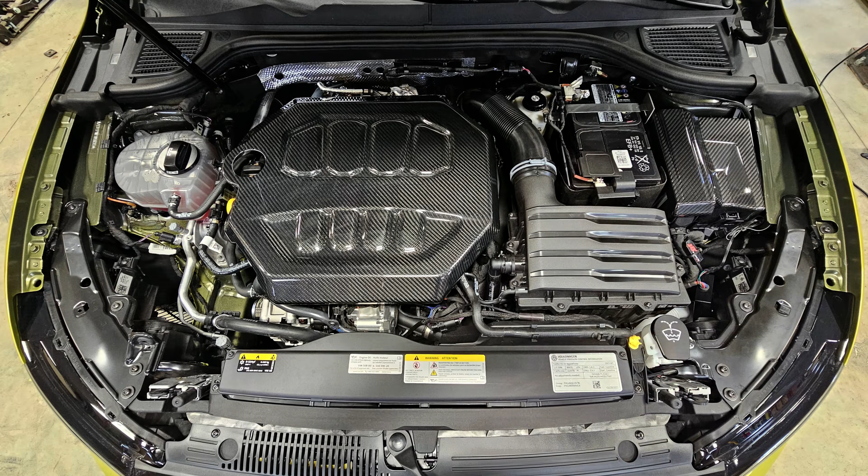Disclaimer number 5, I am running all OEM hardware. It's safe to say and safe to assume that if I were to install some aftermarket performance hardware, my car would make more power on each of these tunes. But just know that right now I am completely stock performance hardware. The only things I have installed in the car are cosmetic or things that make a bit of noise, like the CTS turbo muffler delete, as well as their blow-off valve.

Number 6, my TCU is locked. I am sorry to say that at this present time, my 2023 Volkswagen GTI still has a locked TCU, meaning that there is a torque limitation set by the manufacturer that I cannot surpass.

With that being said, I'm unable to see whether the tunes provided to me are going to be riding that torque limit, or whether they're going to be set at a safer, lower torque limit and possibly give me a flatter torque curve. I'm not exactly sure the limitations on this transmission with it being locked, but all I know is there is the possibility that some companies are riding that torque limitation. Maybe it's going to be up and down a bit, and other ones may have played it a bit safer on the low torque tunes and flatten that out at a lower level.

Number 7 is that I will try my best to let the data speak for itself.

I could go out on the back roads of Mexico and give you subjective information about how well the car drives, how refined it feels, but that's just my opinion. In these videos, I'll try my best to let the data speak for itself, in terms of power and torque on the dyno running each of these different tunes.

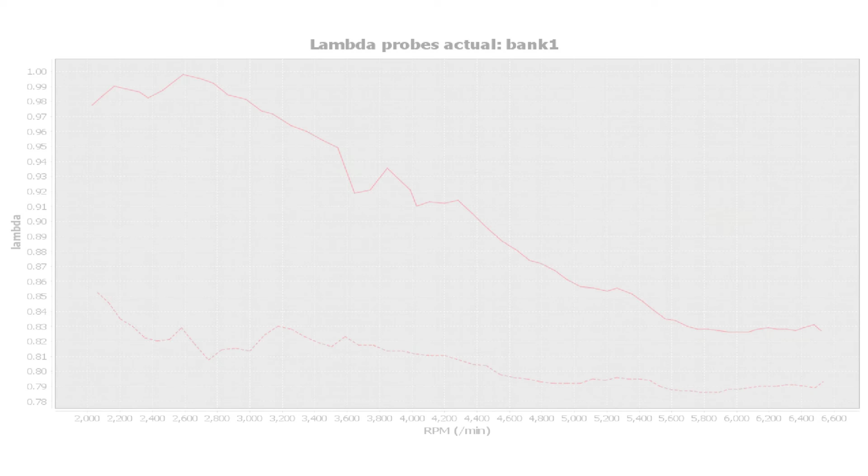Number 8, the air to fuel ratio, or lambda, in each of these tunes may vary. Keep in mind that the leaner something is in terms of AFR or lambda, it might make more power, but it could also affect the longevity of the motor. Whereas if a software company tunes something on the richer side, the motor's longevity might last a little longer. I'm not going to be sharing or going over that in this video series.

Number 9, I will not be sharing any of the data logs I capture on my Mark 8 during this entire process with the public. The reason is each of these companies spent a ton of time, money, and energy creating their own version of the spicy sauce they use to make the GTI work as well as it does on their software. I don't think it's fair, and it would be disrespectful of me to put that out into the public. If you want to know the logs, I highly suggest you purchase each company's software and test them for yourself.

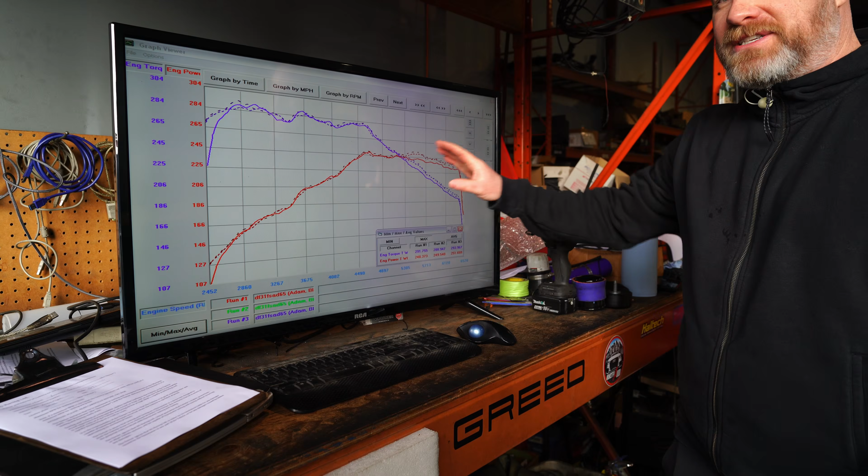In regards to how we'll be doing the testing today, every manufacturer will have 3 runs on the dyno, and once we have them up on the screen, we're going to go with the smoothest of the 3 pulls. We're using a Mustang all-wheel drive dyno, with a smoothing level of 6, and the results are going to be uncorrected.

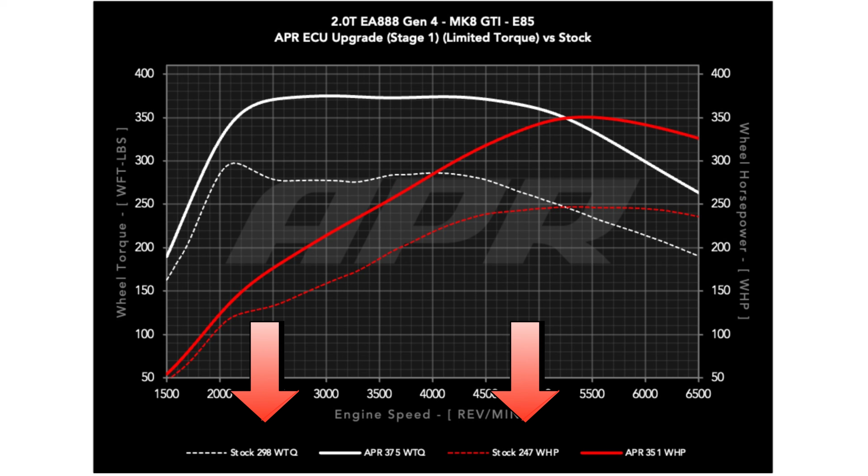You guys should know we're using a dyno jet calibration on this Mustang dyno, because we've seen it very closely resemble the results of other dyno jets across North America. Also, our stock calibrated Mark 8 GTI ran very similar to APR's results on their stock Mark 8 GTI.

And now, what are we running for fuel? You can run between an E60 and an E85 blend on all of these tunes. I reached out to all the tuners to ask what's the most optimal level of ethanol I should use to test on my car on the dyno. They all said roughly E70, except for one that wanted E80 or higher. So I filled up with pure E85 today to make sure we're getting the most out of the tunes on the dyno.

During the disclaimer portion of this video, I discussed that I'm using all stock hardware for performance. I do have some shiny bits here and there and some noisemakers, but all stock performance hardware. I had to modify that stock hardware to make sure my car worked appropriately for this video, and I'll quickly explain why.

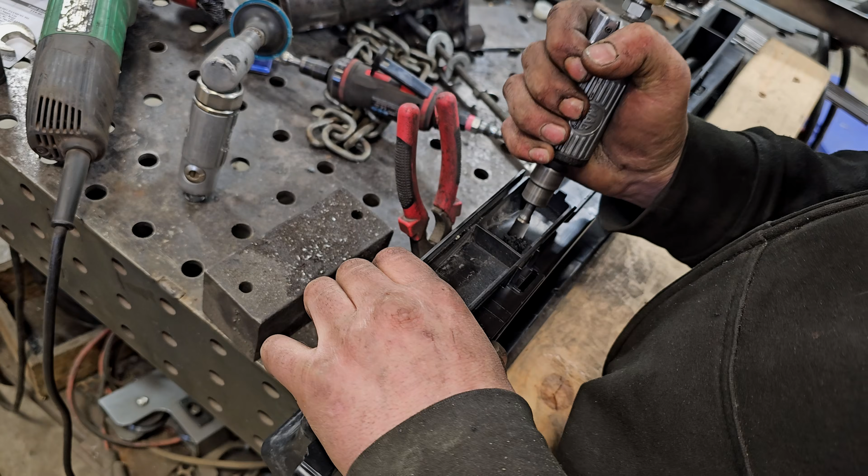I always do some wide open throttle 4th gear data logs prior to getting on the dyno to make sure all of these tunes work properly. For a couple of those tunes, it wasn't working properly. I was getting a drive system malfunction, anywhere from 5700 to 6100 RPM, with completely stock hardware. We were confused, because these tunes are specifically designed for stock hardware. So we reached out to some of the calibrators asking what could be the issue, and they said maybe it needs more airflow. So we cut into the stock air intake duct to allow for more airflow, went out, did another 4th gear pull, and it worked.

No more issues. I do want to give credit to Unitronic though, because we went out with completely stock hardware, no modification made to this box, and their software worked perfectly. But there were some other ones that had issues.

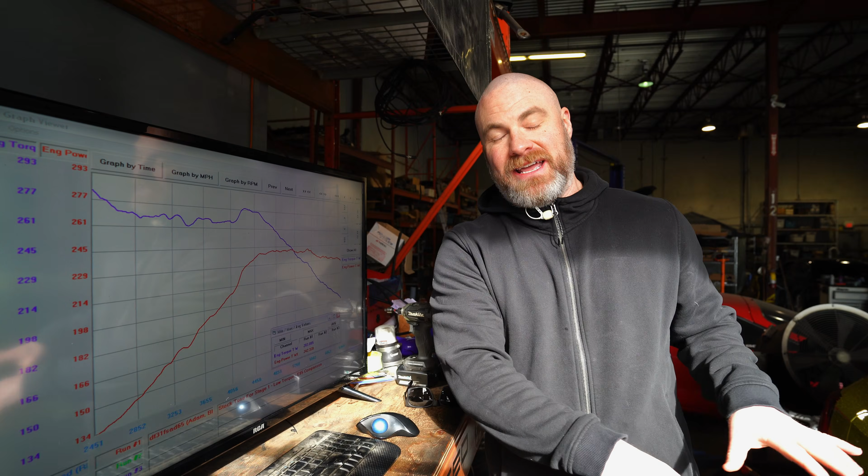Now, the final thing to discuss about this video that's going to be a little different than the other videos is we're not doing a stock baseline run today. That's because the car's filled with E85, and we'd grenade my motor on a stock tune running straight ethanol.

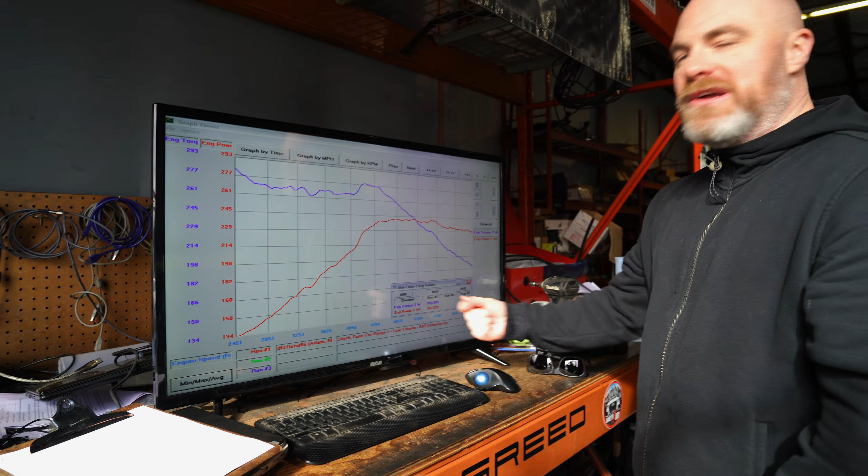So what I've done is gone through the extensive database we have here at Greed about all the stock runs we've done. I found one that was kind of in the middle with a decently smooth curve. This is our stock run, done on a previous day running 93 octane fuel. I made 242 wheel horsepower and 283 wheel torque. That's our baseline today.

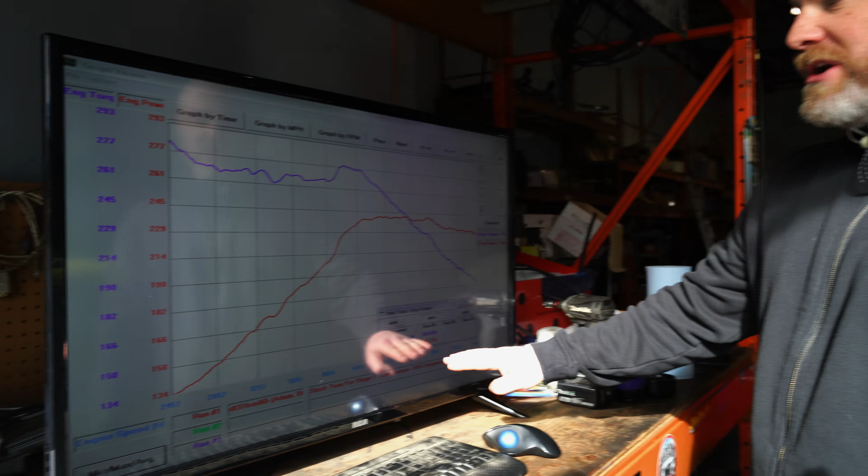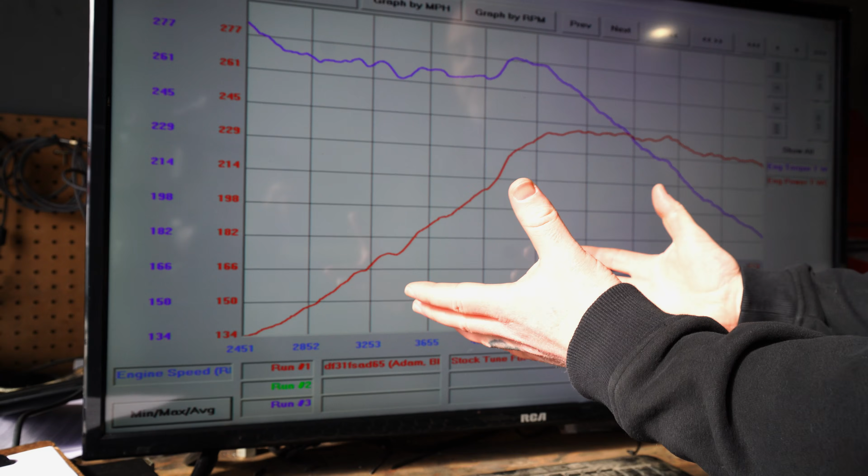Before I choose which company goes first, I'll give you a quick education on how to read a dyno graph. These numbers only correspond to the peak figures we see. This 242 wheel horsepower only represents this tiny spot on the graph, and this 283 wheel torque only represents this tiny spot. There's so much more to look at. Your torque you'd like to see nice and flat, holding as long as you can. You'd like to see your horsepower peak and go nice and high. If you see a really high torque figure down low, the car's gonna feel fast. But if you have really high horsepower up here, the car's actually gonna be fast when you're racing.

To keep things fair and even, I'm going to do the same method I did in the previous videos. In this bag there are pieces of paper with the logos of each company on them. I'm going to shake it all up and pick them out one by one, and that's the order we'll be testing in today. Let's see who's first.

There's one. Number 1 on the dyno today: Unitronic. Unitronic going number 1.

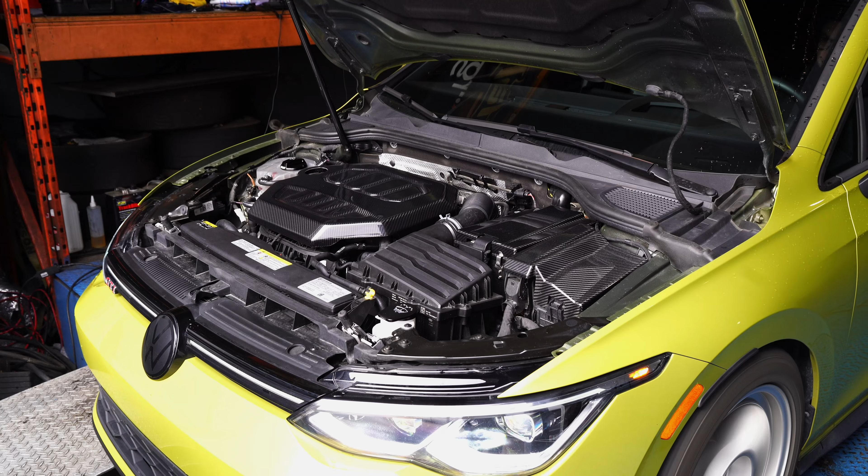If this is an indication of how today's going to go, I'm going to be a very happy camper. Unitronic's out of the way, and we made so much power. I was totally wrong about what I said in the last video about not making much more. This is incredible. Let's take a look at the graph.

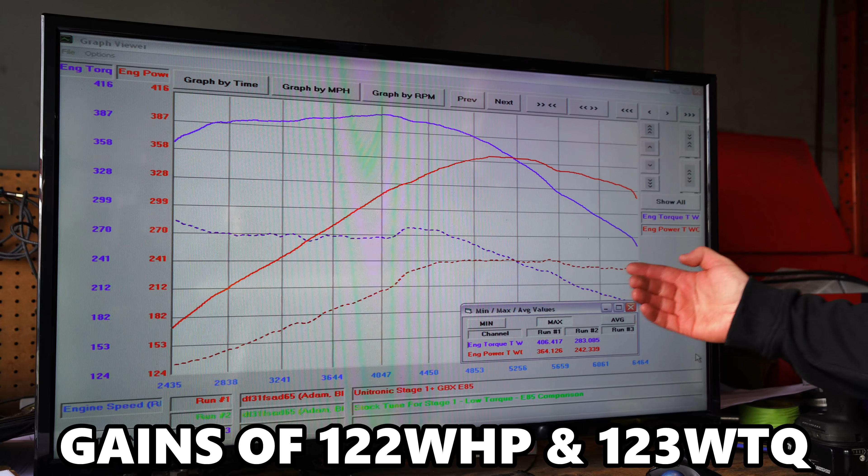122 wheel horsepower gain and 123 wheel torque gain from the stage 1 E85 file compared to stock on 93 octane. Look at those curves, holy moly, that's a lot of power and a lot of torque. Very, very smooth on both accounts. This is gonna be fun.

Unitronic down. Who's gonna be number 2? Number 2 is 034 Motorsport, going number 2.

If you watched my last video about my subjective review of the different tunes on my car, you may have caught when I tried my 100 to 200 and 60 to 130 testing and how it didn't work out due to constant complications. I just had another one - we finished the Unitronic tune and now, flashing the car with 034 software, the immobilizer kicked on. This hasn't happened before.

I reached out to 034 for help and they were immediately on it, saying I need to lock the car, get the key away, wait 10-15 minutes and try again, by which time all the modules should have gone to sleep. This is the first time this has happened with my MK8 GTI, but I wanted you guys to know there's going to be a longer period of time between testing because of the immobilizer issue between the Unitronic and 034 runs.

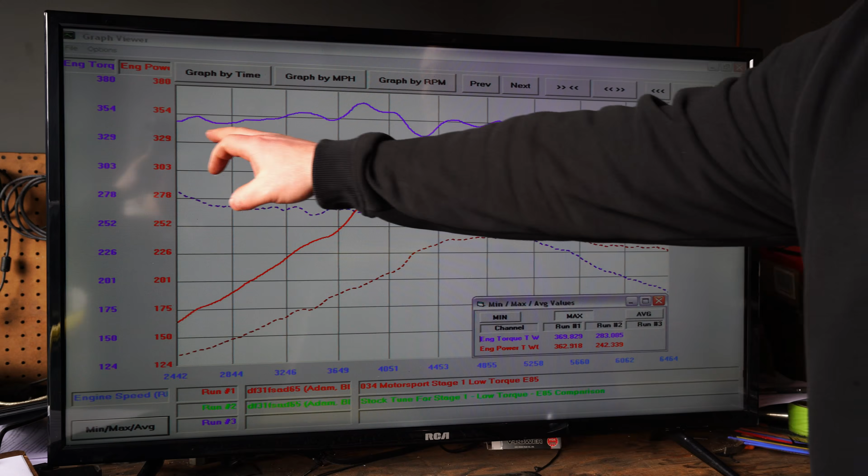Now, I can't say they see the exact same flat torque curve they had before - there was quite a bit of up and down on that run. You can see it dip at the exact same portion, about 4,100 RPM. Both the torque and horsepower drop slightly before heading back up until they reach peak horsepower, which is about 5,300 RPM.

Number 3, let's see who comes up. United Motorsport, number 3.

United Motorsport is done. They made 113 wheel horsepower and 96 wheel torque over stock. That puts them with the lowest horsepower so far, but kind of right in the middle with the wheel torque.

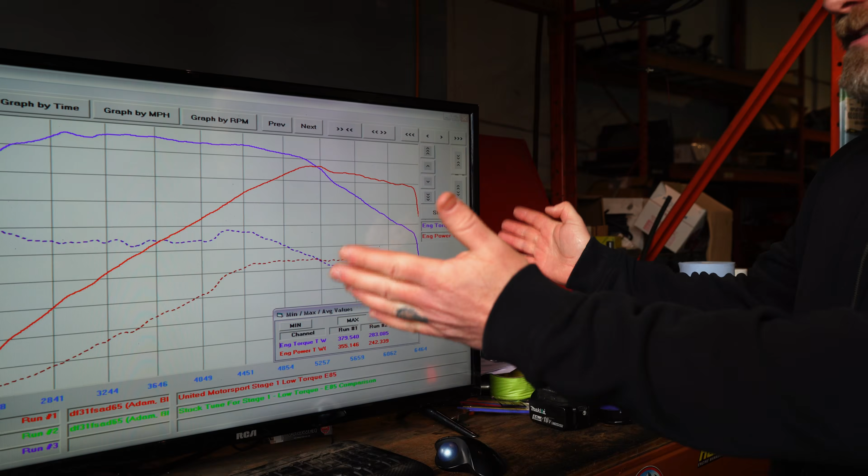Let's take a look at the graph. Once again, they've done it. This was pretty consistent for all 3 runs. Really, really nice and smooth. Extremely smooth power band. Not quite as high as Unitronic, but very, very smooth.

Only 2 more to go. Who is number 4? Number 4 is APR.

APR's 3 runs are done. They made 111 wheel horsepower and 85 wheel torque over stock, putting them at the lowest wheel horsepower and the lowest wheel torque so far today, by just a smidge.

Let's take a look at the graph. The torque looks reasonably flat, but we do have this weird dip at about 3,300 RPM before it flattens itself out. The horsepower in roughly the same area also takes a dip, flattens out, and then up top at about 5,100 RPM, you get this weird bump up in horsepower. It's not as smooth or as linear as the other tunes.

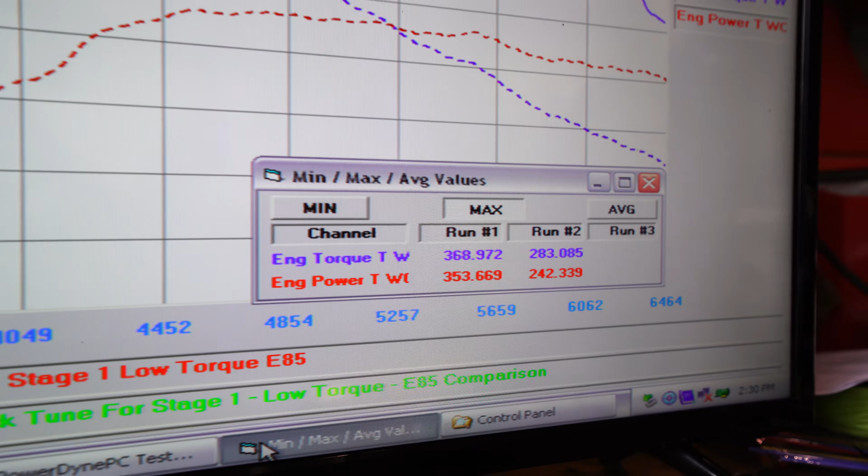And there's only one more to go, and that would be Tunezilla. Number 5 and final. Let's see what they can do.

We've wrapped up the final tune of the day with Tunezilla. We made 120 wheel horsepower and 128 wheel torque, the highest torque level of the day, and tied for second for their wheel horsepower. Let's take a look at the graph and see how they did.

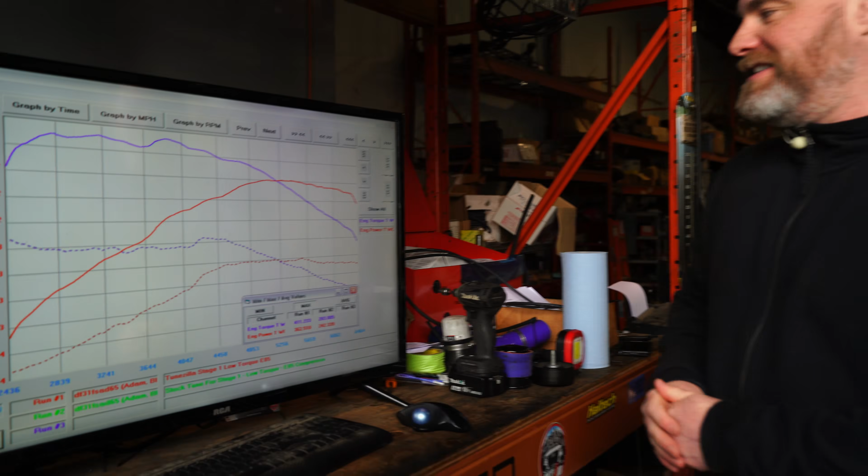Reasonably smooth curves. You get a bit of up and down, but nothing too severe. Their horsepower does look nice and smooth all the way up to red line. A pretty damn good looking graph from Tunezilla.

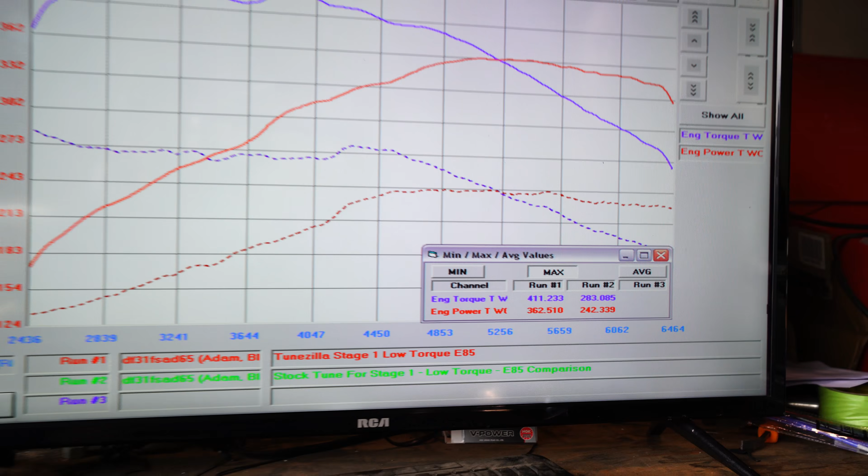Now that we have it wrapped up, let's take a look at the top 3 performances for wheel horsepower. Number 1 being Unitronic, number 2 being Tunezilla, and tied with 034 Motorsport for number 3. The only reason I put Tunezilla as number 2 and 034 as number 3 is because of the torque differences. Torque is much higher on Tunezilla.

And for the final comparison of the day, we're going to be comparing the 3 highest wheel torques of the day. Number 1 going to Tunezilla, number 2 going to Unitronic, and number 3 going to United Motorsports.

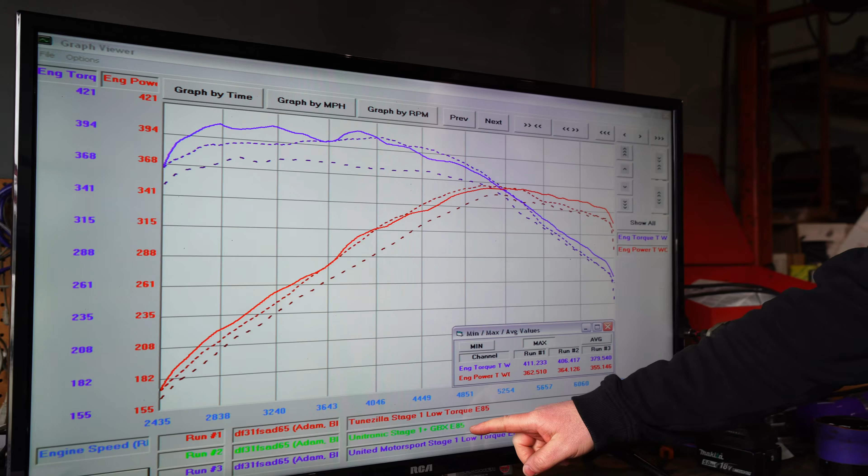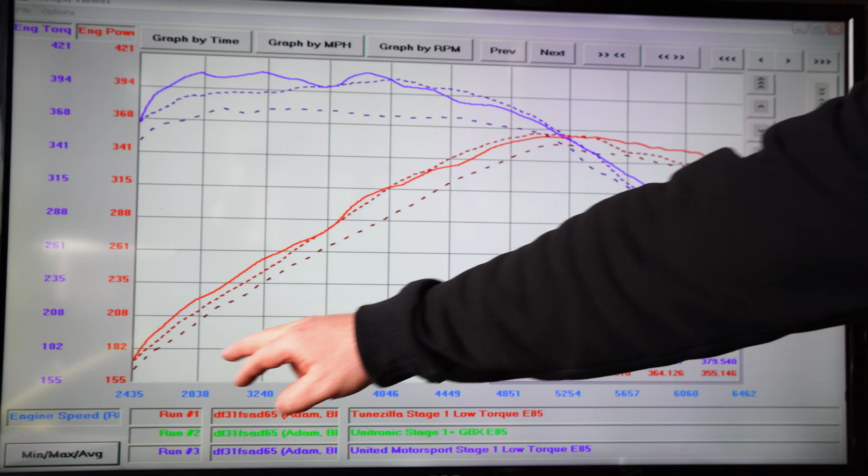What we see on the graph again is some waviness up top from Tunezilla, and then it tapers off. Unitronic and United Motorsports are very, very smooth, but Unitronic is significantly higher than United Motorsports. In terms of the horsepower, we see all 3 taking off nicely, but we do notice that United Motorsport trails below the other 2 in the low range and the mid range. Not until you get up to that special level of 5,200 RPM do they kind of all meet up, but we do see up top that Tunezilla produces more horsepower and more wheel torque than the other 2 tunes.

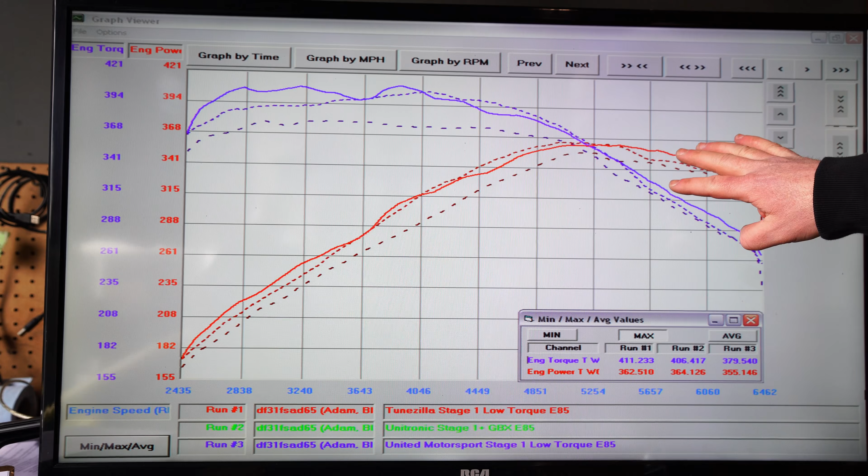Can you believe it, guys? I never thought I'd be able to say this, but my stage 1 low torque comparisons on my MK8 GTI are finally done. No more software changes. Now it's time to upgrade the hardware, which will start in the videos to come. What we saw today was a difference of only 11 wheel horsepower at peak, from the highest performing to the lowest performing tune. Regardless of what software you go with, you're getting a ton of power on E85.

I'm first to admit when I'm wrong, and I was so wrong. In my subjective review video, I didn't think we were gonna make a bunch more power. We made so much more power than we did on 93 octane. I'm really excited to keep modding this car, keep this train rolling, and see how much more power we can make, and eventually get it to the drag strip and start racing with it this season.